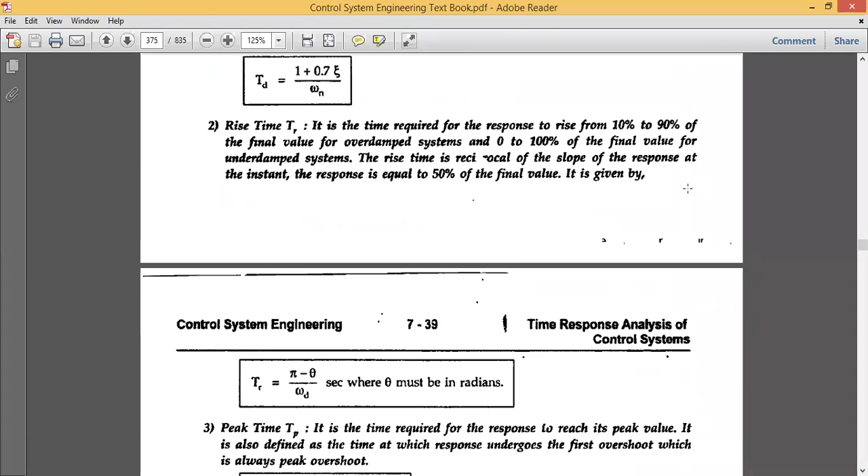In the transient response analysis specification, in my previous lecture I considered one signal starting at point 0 and reaching its maximum 100%. Not only reaching 100%, but going beyond it, and that point is known as the overshoot, denoted by MP.

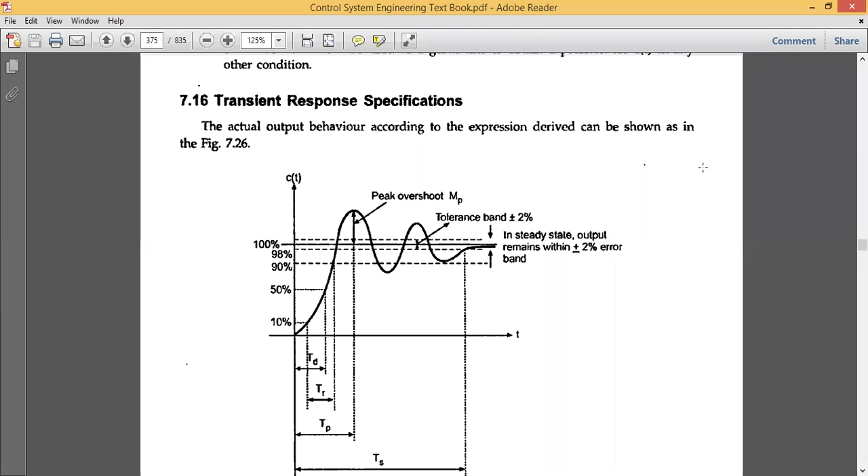These definitions were studied in the previous lecture with a tolerance band of plus or minus 2%. We defined TD, the delay time, then rise time, peak time, overshoot, and settling time. These are the five important definitions discussed previously.

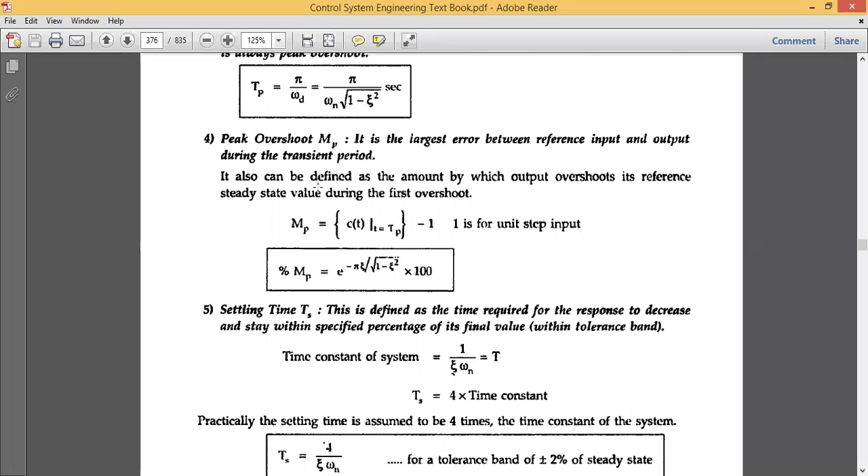In today's lecture we will try to derive these definitions we saw previously and get the answers. Let us start with the very first and most important derivation.

The important thing here is that the derivations we consider in this video lecture will be for second order systems, because transient response is analyzed for the second order underdamped signal, so all derivations will be with respect to second order underdamped systems.

Let us consider the very first derivation, for peak time, represented by TP. TP is your peak time, and sometimes the question will ask how to derive the equation for peak time TP for a second order underdamped system.

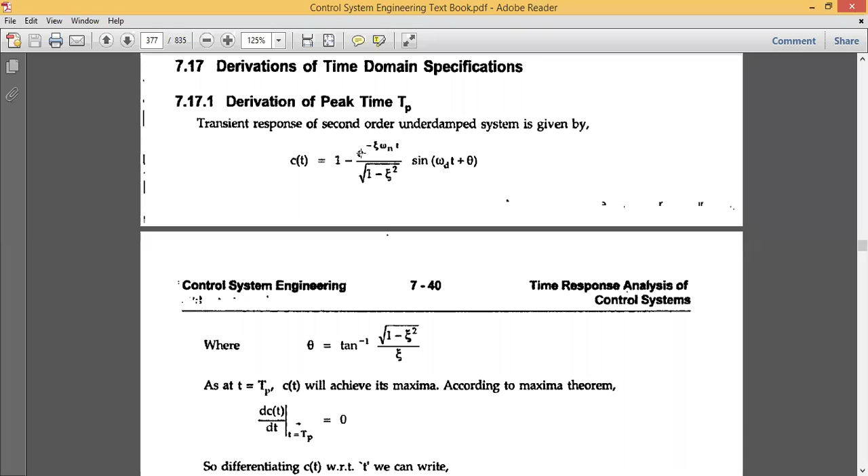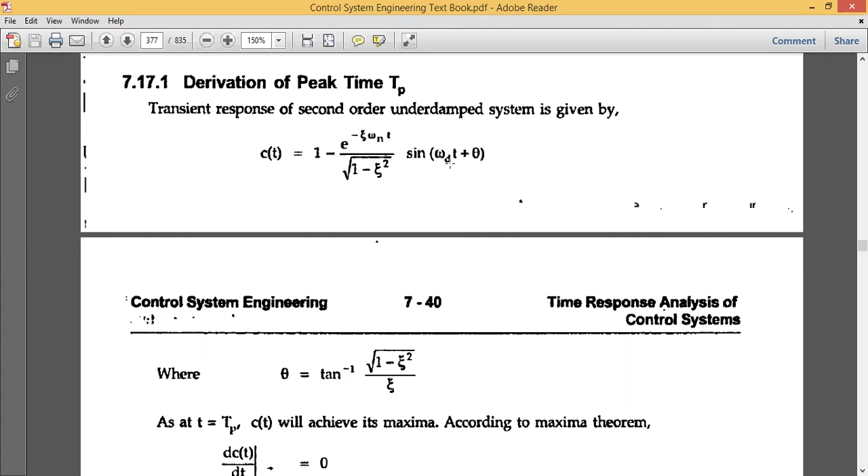Let us consider the output C of T, the output response of the system. Remember, this derivation is with respect to transient analysis. The output C of T is given by 1 minus exponential e raised to minus zeta into omega n multiplied by time t, divided by root of 1 minus zeta square, multiplied by sine of omega d t plus theta. This is the transient response equation of a second order underdamped system.

The assumption we have made is that the system taken for analysis is second order with respect to time transient response, but it is underdamped — we are not considering the overdamped case, only the underdamped condition. So once we consider this time t, the transient response represented by C of t, remember this C of t is nothing but the output.

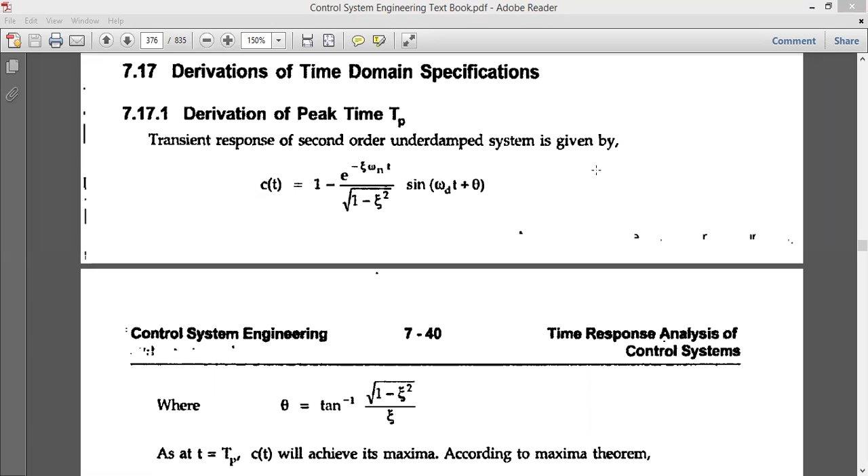C of t is nothing but your output response of the system. Now the angle theta is denoted by the tan inverse of root of 1 minus zeta square divided by zeta. So this is the formula for theta.

Now the condition we will consider here is: let the time t is equal to tp. For example, if you're starting at point t, t is equal to 0, t is equal to 1, t is equal to 2, t is equal to 3. Sometimes that signal which you are getting at the output of the system reaches point tp.

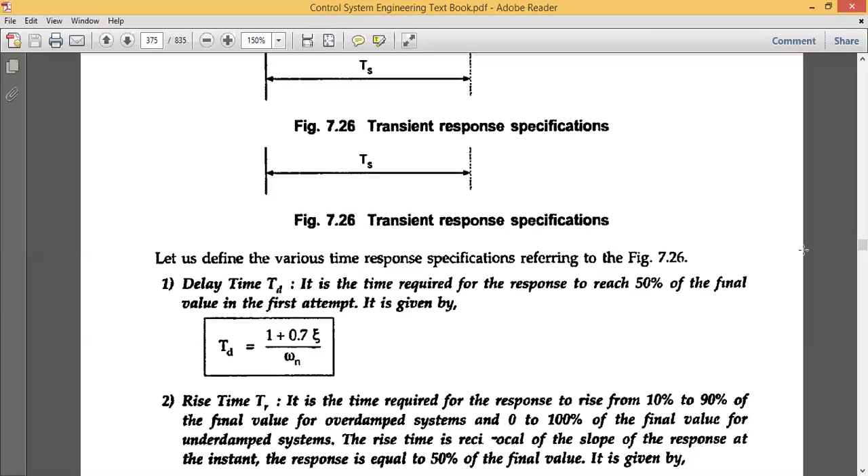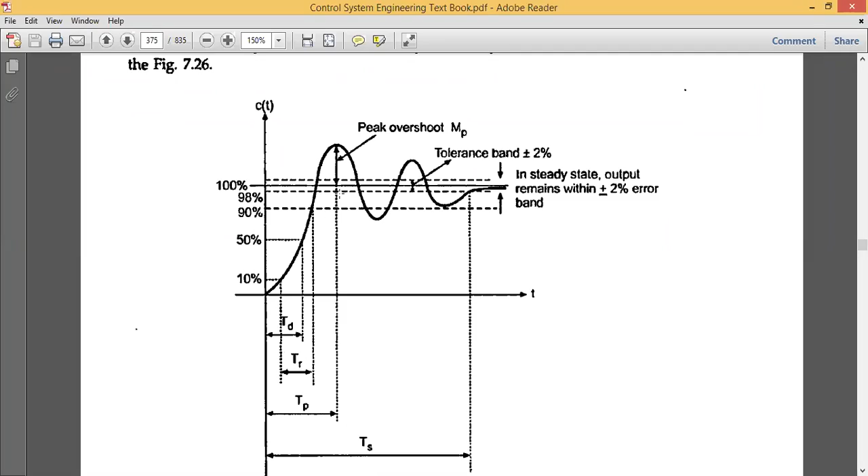At point tp, I will just show you the graph which we have seen yesterday. This is the point tp. This duration is my tp duration. It starts from 0 and reaches its maximum point at tp. This is the assumption we are going to consider for this particular derivation.

Then C of t will achieve its maxima, meaning maximum value, at point tp only. It is receiving its 100%. Sometimes it will go beyond the 100% value.

So therefore, first we have considered the output signal and defined the angle theta, then we consider one assumption here that t is equal to tp. And what is happening at point tp? The value of C of t is reaching its maximum value.

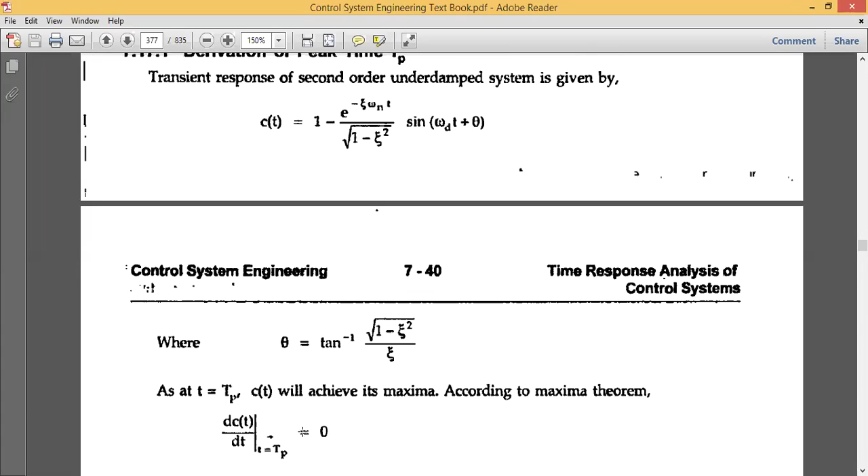Now let us consider one theorem here, the maxima theorem. How to define the maxima theorem: it is differentiating, d by dt of C of t, at t equal to tp, which is equal to 0. So according to the maxima theorem, d by dt of C of t at t equal to tp is equal to 0.

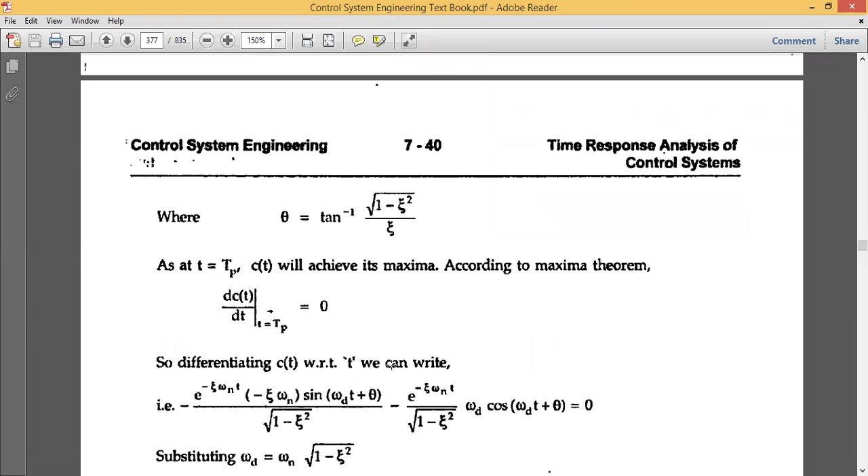So let us differentiate C of t with respect to t, because this is my C of t. Now you need to differentiate this output equation with respect to t. Once you differentiate with respect to t, the equation we get here is...

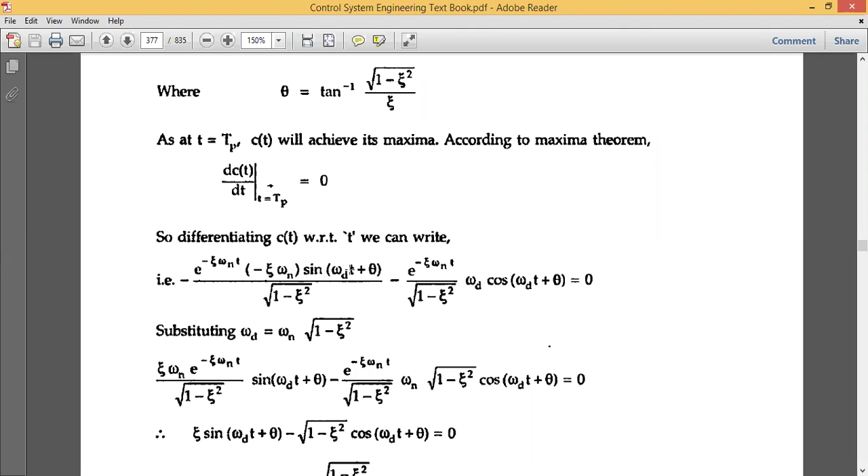Minus of e raised to minus zeta omega n into t, multiplied by the bracket minus zeta into omega n sine of omega d t plus theta, plus theta. You can see this equation, and this equation divided by root of 1 minus zeta square.

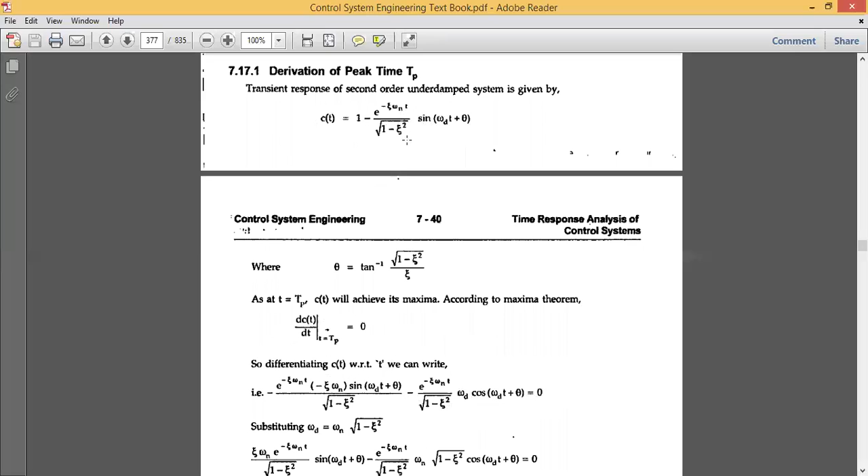Minus e raised to minus zeta into omega n into t, divided by root of 1 minus zeta square, multiplied by omega d into the differentiation of sine, which is cos. So the differentiation of sine is cos omega d into t plus theta, equal to 0. What we have done is differentiated the output signal C of t with respect to t, and then after differentiating we equate it to zero.